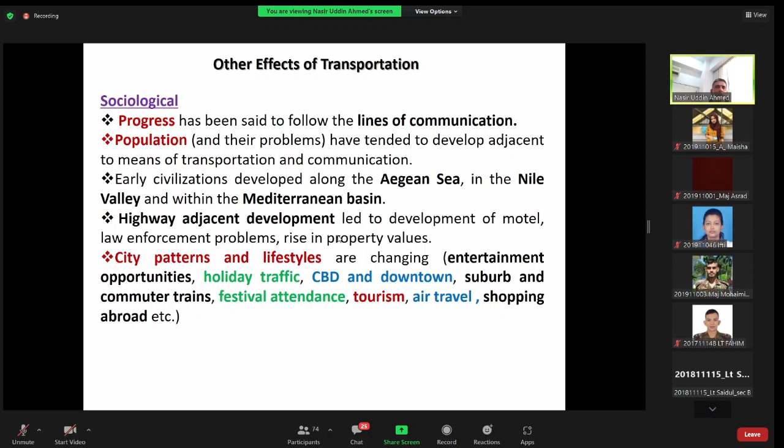And even during festivals, people go out for shopping. During Eid or during Puja, you will find that from Bangladesh a lot of people cross the border. They go to Calcutta, or some go to Thailand, and some go to Singapore for shopping. All this happened due to the development of the communication system or transport system, and these are called the sociological impacts of transportation.

Now, cultural effects. It is difficult to distinguish the cultural effects from the sociological effects because these two merge sometimes, and it becomes very difficult to differentiate between them.

If you think about a big country, for example India, it has got more than 25 states. Earlier, in each state, ethnicity was different. Now, with the development of a good road network, the difference or provincialism and regionalism has decreased. Same the case for other countries of the world.

And globally, the worldwide differences have decreased because people now move continuously. That's why you might take your breakfast in Bangladesh, lunch in Mumbai, and dinner in Dubai, and the next day you come back. That's how people are moving.

One cultural impact is that since regional differences are disappearing, it has got a negative impact because local color and character are also disappearing.

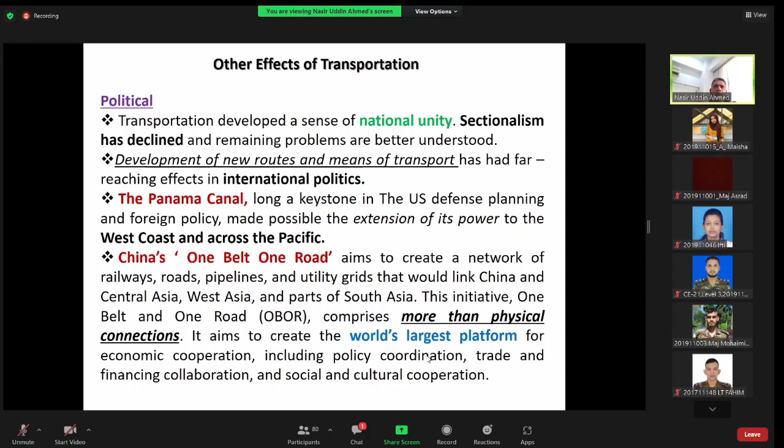And there are other factors, like congestion of cities. In cities, once they become congested, people look for alternative means of transportation. Transport agencies are also a generator of revenue for the government, and with transportation facilities, billion-dollar businesses are affiliated. So these are other factors that come up with the development of transportation.

Transportation and the individual - how is transportation connected to the individual? Transportation and someone's personal necessities, comforts, and luxuries, as well as those of his family and neighbors, are closely interrelated. So anything you buy from a shop has got a cost element of transportation.

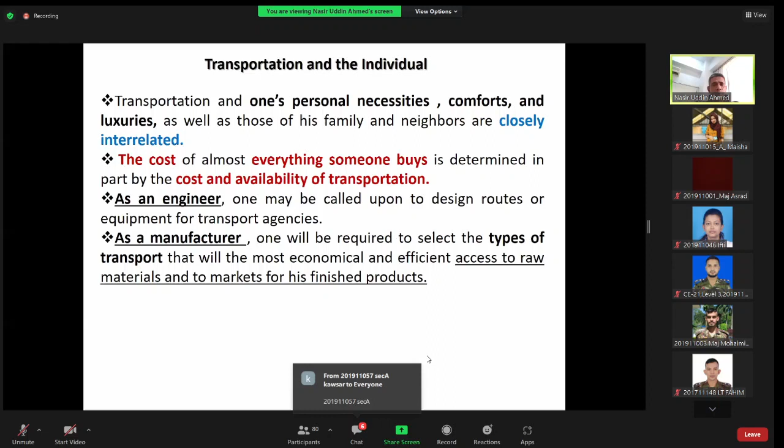How can we relate individual transportation as an engineer? For example, you may be called upon to design routes or equipment for transport agencies. As a manufacturer, you will be required to select the types of transport which will be most economical and efficient to extract raw materials or to sell or distribute finished products. Accessing raw materials requires one type of transportation system, while distributing finished products from your manufacturing plant requires a different type.

If you want to be a financier, you will find that transportation is a fertile and demanding field for investment. For example, in Bangladesh, some foreign companies want to make a dedicated expressway from Dhaka to Chittagong. The aim is that after constructing this expressway, they will operate it, for example for 30 years, collect revenues, and once the cost is recovered, they'll leave it to the government.

Those who want to finance also look for these opportunities - the development of infrastructure, and also making it a source of their earning. Recently, there have been some initiatives from China in Pakistan and Sri Lanka, and one of the ports of Sri Lanka has now become a controversial issue, with some resistance in Pakistan, because China is making some infrastructure there.

As a lawmaker, one must consider the needs and problems of the country in relation to transportation and formulation of regulatory policies. So when you introduce a new transportation system, you have to introduce new law. That's how a lawmaker is associated with transportation.

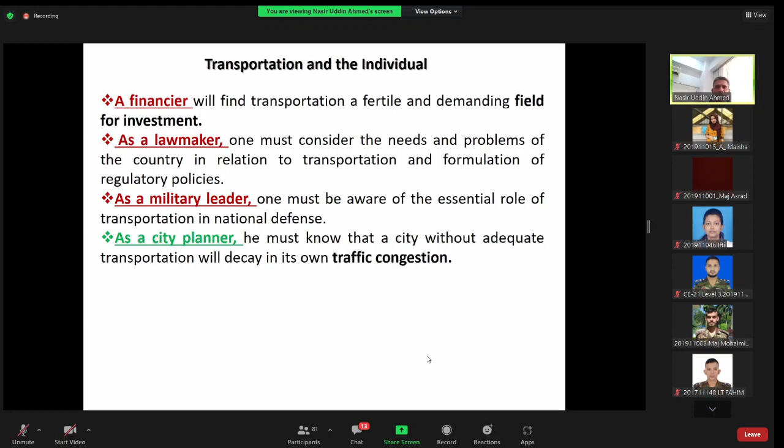As a city planner, one must know how a city will function, because the city planner will try to make a city with certain conditions in mind. So instead of car-based infrastructure development, he has to plan for public transport-based development - that means transit-oriented development. The city planner plays an important role, and that's how city planners, town planners, and transportation engineers have to work together at some point.

Then we discuss the sociological impact - with the effect of transportation, how the pattern of life and culture is changing. That is a field of study for the sociologist.

As a citizen, you'll be concerned with all of the above issues, which is required for the well-being of yourself and your country. And last of all, as a student of this course and of civil engineering, it is your obligation to understand the fundamental principles and conditions. If you don't understand properly, you may misuse the transport potential, which may incur economic loss.

Transportation is a topic about which everybody gives their opinion - why Dhaka is a congested city, how to remove the congestion of Dhaka - you will see that everybody makes some comment. But you, as an engineer, want to give an opinion that should not be a layman's view. You want to give an opinion based on a solid engineering background.

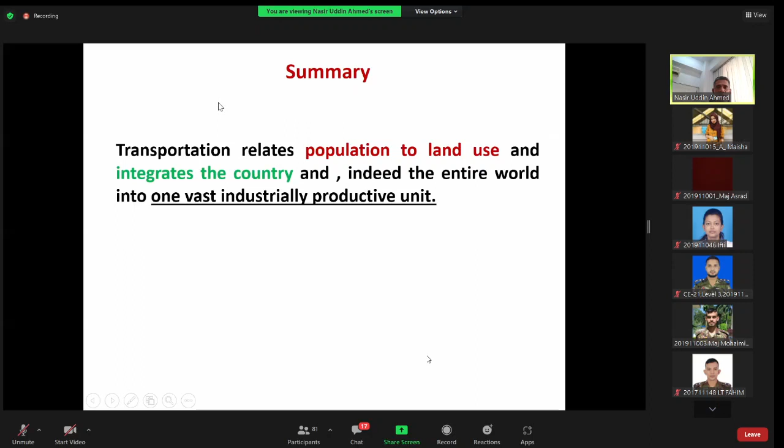So transportation relates population to land use and integrates the country. Actually, it integrates the entire world, and makes the whole world into one vast, industrially productive unit. So that is the first lesson. We'll be closing this lesson, and then shifting to our next lesson, lecture 2.

Lecture 2 is about transportation systems. For this, our reference will be the book by Khisty and Lall, Transportation Engineering, and chapter 1 of this book is relevant to this lecture on transportation systems. The topics you can see on the screen will be covered: the nature and features of transportation engineering, then the interdisciplinary breadth of transportation engineering, and system approach.

What is system approach? We'll be learning that, then movement transportation, transportation system characteristics, then some attributes of transportation systems, hierarchies, and problems related to transportation. And at last, we will relate transportation to sustainability, and the fields of transportation engineering.

The Institute of Transportation Engineers, ITE, gives the formal definition of transportation engineering as the application of technological and scientific principles to the planning, functional design, operation, and management of facilities for any mode of transportation, in order to provide for the safe, rapid, comfortable, convenient, economical, and environmentally compatible movement of people and goods.

Let's try to understand this with an example. If you take the example of MRT 6, at one stage a feasibility study was done and the route was determined. That is called the planning stage.

Once the planning stage determines the route, you have to go for the functional design of the MRT line, because you need to decide the route, how many trains will be there, what will be the capacity, what will be the landing stations, and how people will enter and leave the MRT. So those issues fall under functional design.

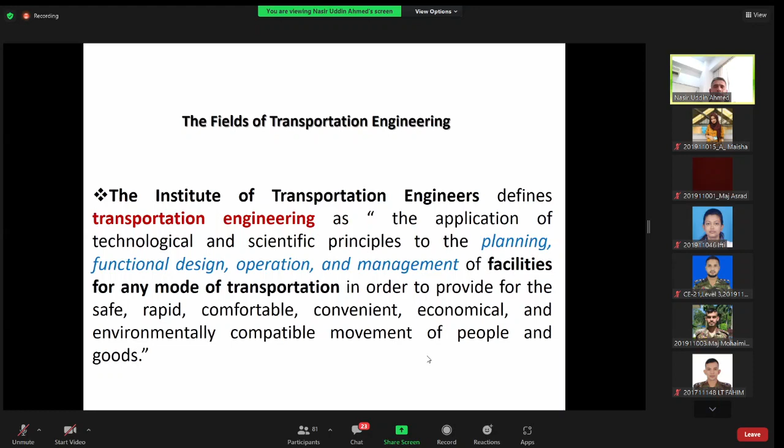Traffic engineering is more specific, a branch of transportation engineering. It deals with the planning, geometric design, and traffic operations of roads, streets, highways, networks, and terminals, and neighboring abutting lands, and relates this with other modes of transportation. Traffic engineering is an offshoot of transportation engineering.

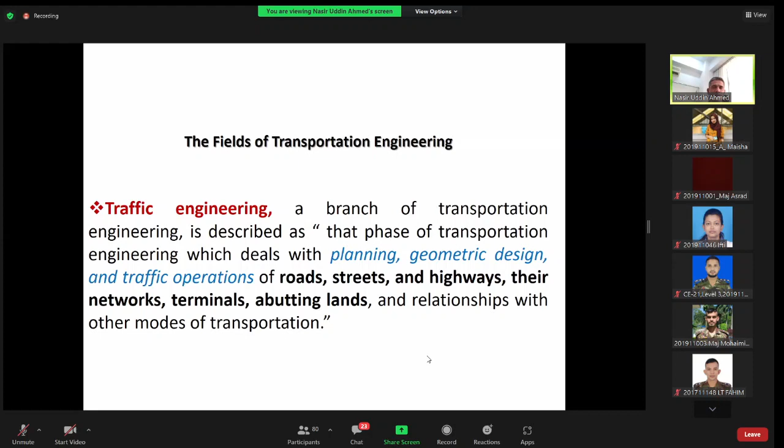Transportation engineering is said to be a multidisciplinary area of study because here you draw concepts from economics, geography, operation research, regional planning, sociology, psychology, probability, and statistics, together with the normal analytical tools of engineering.

For example, if you want to introduce an MRT system, you need to decide whether it will be a viable option or not. When you use an MRT system, you may compel people who will not avail the MRT, those car users, by imposing road pricing on them. And when you plan the MRT line, geography is an important issue to think about, along with operational research.

Operation research is a discipline which deals with the application of advanced analytical methods to make better decisions. It is a systematic approach where, through various advanced analytical tools, you can differentiate between various options and reach better decisions.

Regional planning is also integrated with transport. For example, it is said that when you plan for a subway or MRT, those subway stations or MRT stations should be such that the township around those stations gets developed accordingly, meaning the town should be developed in a concentric pattern instead of a linear pattern.

In our case, what happens is we see roads developed and then ribbon development adjacent to the road, meaning unplanned development of the city, which we see very much in our country. But with proper town planning, you can integrate MRT lines or subway lines with the town planning system, so that the system you are developing becomes a transit-friendly system.

Sociology covers the behavior of people, whether they will accept it or not; psychology covers their mindset; and probability covers the likelihood of using facilities. All these help determine the future or probable condition of a specific route. For example, if the traffic volume today in 2021 is X, then maybe by 2025 or 2030 it will be more. So you have to make some analysis, and you will require statistical tools to analyze those issues.

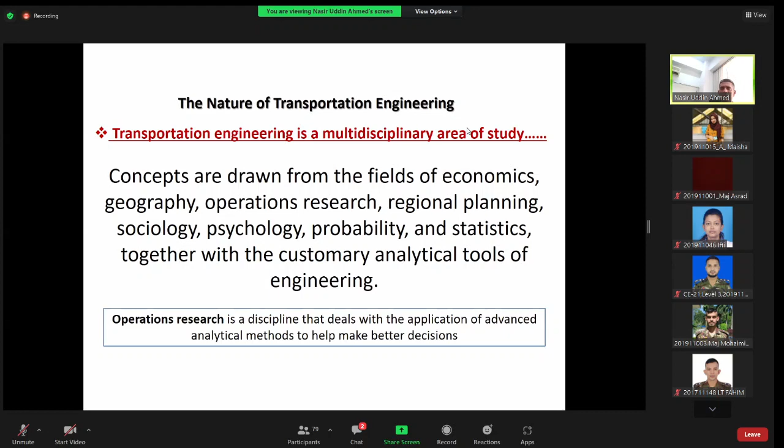That's why it is said that it is not only about transport engineering. You should have ideas about economics, regional planning, sociology, psychology, statistics and other issues. In the next slide, you can see the interdisciplinary breadth of transportation engineering.

In this slide, the upper left part shows social science, economics, planning and architecture, and system engineering. This falls under transportation planning, and these are called the soft side of transportation engineering.

On the right bottom side, you can see geometric design, soil mechanics, and pavement design. These are called the hard side of transportation engineering. Together, the soft side and hard side make up transportation engineering in total.

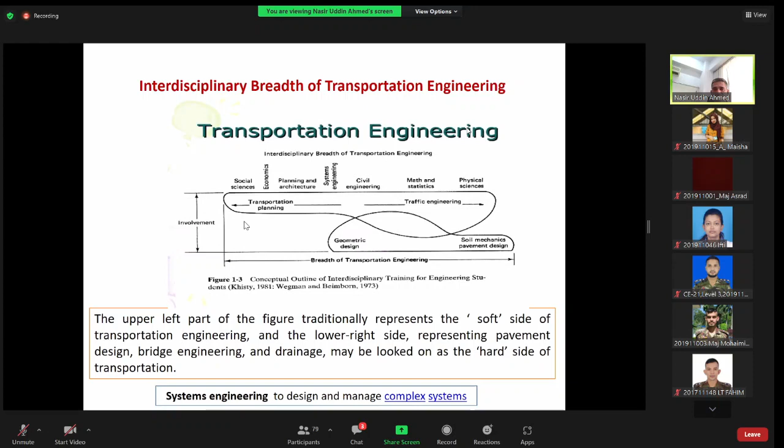System approach of transportation engineering. What is a system? A system is a set of interrelated parts called components that perform a number of functions in order to achieve common goals. In a system, there are interrelated issues which, if synchronized, make the system perform. System analysis is the application of scientific method to the solution of complex problems.

This is a major hassle because our road networks are developed in such a way that dedicated pedestrian walkways are not present, and sometimes disabled people cannot use those footpaths. At intersections, the facilities for pedestrians are not enough, and the system is not pedestrian friendly. So these are the community problems.

And then design alternative actions to achieve step 2 and 3. So in step 2 and 3, you have set your goals, you have set your objectives, and then now you find out what are the alternative actions you have. And then we evaluate alternative actions in terms of effectiveness and costs.

For example, for the pedestrian crossing in the mid-block, you may go for underpass, you may go for a foot over bridge, or in an intersection also you can go for overpass or underpass, or you may just keep it as it is, meaning with the signal the pedestrian will cross. So effectiveness and cost, these two terms will come at that time.

Step 7 is question the objectives and all assumptions. So again, you are questioning the objective that you have set, the assumptions that you have made. And then in step 8, you look for new alternatives, or you modify your plans, and then maybe you establish new objectives, and you repeat the cycle until a satisfactory solution is reached, which will meet the criteria, standards, and values.

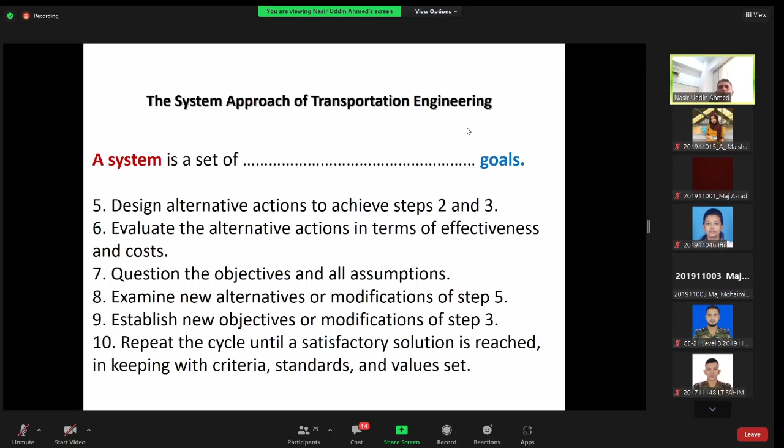So that means the system approach of transportation engineering is that first you have to identify what is the need of the community of the users, and then you have to set the objectives or goals. Then you have to look for various options. You have to see which option is most cost effective, effective in terms of operation and cost, and which is convenient and brings comfort for the users. And then after a lot of trials, you reach a solution. That is called the system approach of transportation engineering.

Now I'll be talking about the movement in transportation, conditions for movement of people and goods. This is important. The first topic is complementarity, that means the relative attractiveness between two or more destinations.

For example, if you are living in point A, whether you go to point B, point C, point D, or point E will actually depend. For example, you are living in Uttara. Now for study purpose, you may come to MIST, you may go to Dhaka University, or you may go to Bashundhara where there are some private universities. So the place has got some attractiveness, and then you have got some special facilities. These are the issues you look for at that time.

Then the desire to overcome distance, which is referred to as transferability. It is measured in terms of time and money. You need to overcome this distance using the best technology available. For example, from Uttara, if you want to come to MIST, what are the options you have? You can come by bus at present, or you may use your own car, or you may have multiple transportation modes. At that time, you will see which one saves you time and which one saves you money. That's how you choose.

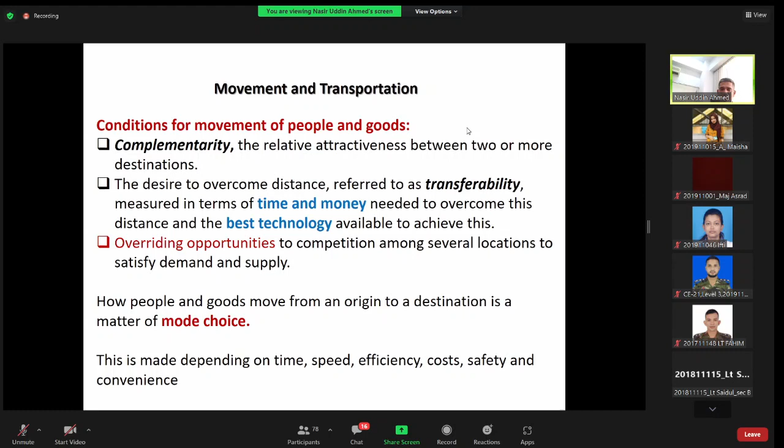And then the last point is overriding opportunities, that means when there are several locations and you have to choose out of them, which location has got better opportunities. So that actually guides the movement of people and goods based on these issues: complementarity, transferability, and overriding opportunities. So how people and goods move from an origin to a destination is a matter of mode choice. This mode choice is made depending on time, speed, efficiency, cost, safety, and convenience.

This slide shows the simple connection between land use and transportation. It's like a circle, because certain land use will produce certain amounts of certain types of trips. If the land is used for residential area, every day morning there will be some trips made for school, some trips made for work, and some trips made just for shopping.

And if the land use pattern is an industrial area, the mode of transport will be different. So based on the trips, the transportation needs will be different. For an industrial area, transportation need is one thing; if the land use pattern is residential area, transportation need is another.

Then you have to look at what facilities you have. For a residential area, you may have an MRT to connect that residential area to other destinations. You may have taxi cab, you may have BRTs, you may have private cars. What transportation facilities do you have?

Again, that is connected to accessibility. There are MRTs, there are cars, but can you afford it or not, and which one is good for you? That is one issue. At the same time, the road network that is available, whether it allows you to access a particular facility or not. For example, your house is located...

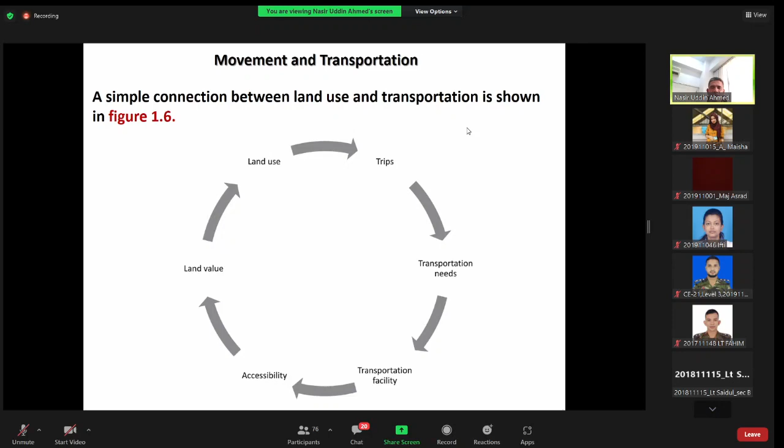With transportation facilities, as I said previously, land value is related. Whenever new facilities are developed, land value increases, and land value is related to land use. So land use, trips, transportation needs, transportation facilities, accessibility, land value - these are all interrelated. Land use is one of the prime determinants of movement and activity.

We're talking about movement and transportation, and this activity we'll call trip generation, which will dictate what transportation facilities - streets and bus systems - will be needed to move traffic. So a change in accessibility will determine the change in the value of land, and this change may affect the way the land is currently used.

For example, for Mirpur DOHS, those residing there - if people find that they can easily access the MRT stations located at Pallavi, the land value will be one type. And if they don't have that access, the land value will be different. So a change in accessibility determines the change in land value, and it will change the way the land is used.

Now, if such change occurs - meaning if a residential area changes to a commercial area - the trip generation rate will change, and the whole cycle of changes will result.

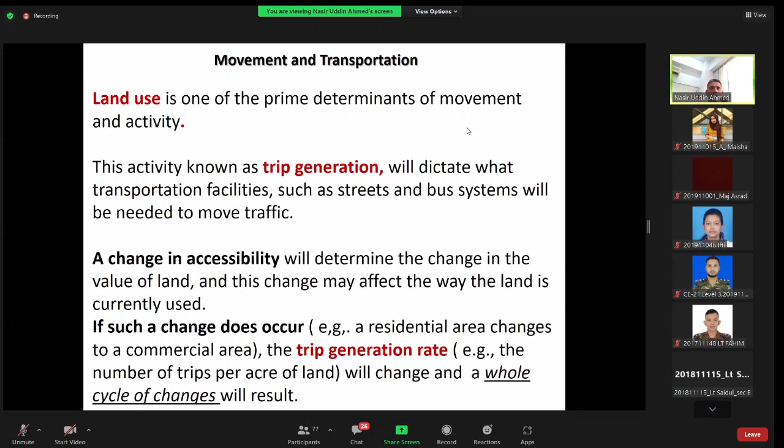Transportation system characteristics - this is a simple slide. There are 4 basic elements in most transportation systems. One is called a link - meaning the roadway, which connects two or more points, such as roadways, sea lanes, airways, waterways, or beltways.

Then you'll be requiring vehicles - it can be a motor car, bus, ship, or airplane. Then you will be requiring terminals, meaning the nodes for travel, and in case of sea, where the shipment begins or ends.

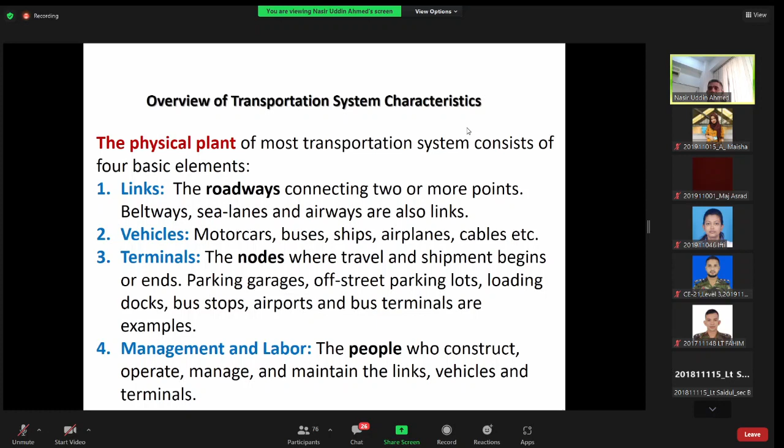Then you'll be requiring parking garages, off-street parking lots, loading docks, bus stops, airports, bus terminals - these come under terminals. So one is the road itself, one is the vehicle, then the terminals, and then you'll need some people to manage, operate, and maintain these links, vehicles, and terminals. These are the 4 basic elements of any transportation system.

This is an important basic attribute of the transportation system. Transportation systems can be evaluated in terms of 3 basic attributes: ubiquity, mobility, and efficiency. What is ubiquity? It means the state or capacity of being everywhere - the amount of accessibility to the system, the directness of the routing between access points, and the system's flexibility to handle a variety of traffic conditions.

For example, if we take highway and railway - highway is more ubiquitous compared to railroads because highways are more accessible. Routes give more or less door-to-door service. But in case of railroads, they follow a fixed line and do not give door-to-door service. So from the ubiquity point of view, highways are more ubiquitous than railroads.

But within the highway, if we talk about freeways and local roads, freeways are less ubiquitous because freeways have access control. Your house may be located just beside a freeway, but you may not have access to it. Local roads and streets are more accessible.

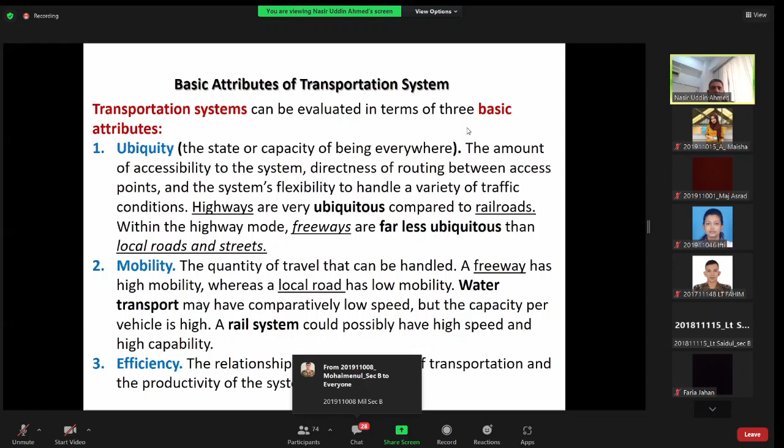Table 1.1 summarizes the basic characteristics of major transportation modes. Just see the slides; I won't go into details like highways, ubiquity, mobility, efficiency, mode, passenger and freight, then rail transport, air transport, and water transport. You must go through these in terms of the three attributes—ubiquity, mobility, and efficiency—and see which modes relate to each system, classified into passenger and freight categories. Let's go through these slides.

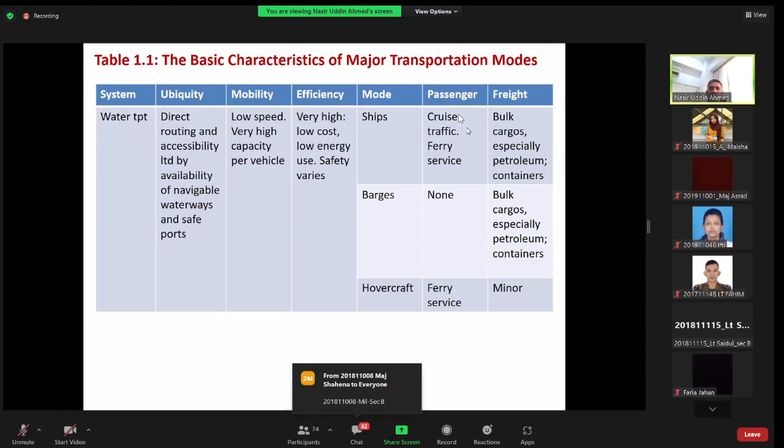Transportation systems hierarchies involve the classification of transportation modes into different operational or functional classes. Now we're talking about the functional classification of highways, because if we classify roads based on the function they provide, it becomes easier for others to understand—for example, economists, sociologists, planners, and administrators can classify roads according to their functional use.

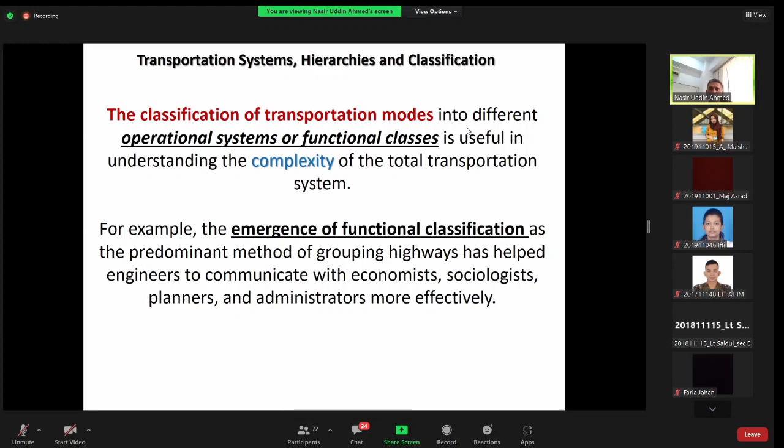This functional classification is widely used in Western countries but not much seen in our country. In our case, roads have RHD or LGED classifications based on traffic volume—national highways, regional highways, district roads—and with the increase of traffic volume, the status of these roads changes. So our classification is based on traffic volume, but in other countries, they classify roads according to their intended use.

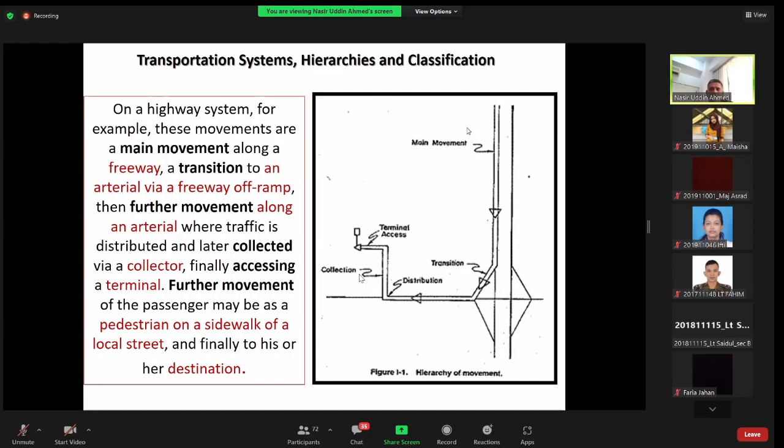Looking at this slide, this is the highway hierarchy. For example, this is the expressway, so the main movement occurs through this freeway, and through a ramp, they may come to the arterial. Then from the arterial, through a distributor road, traffic is delivered to the local streets. Similarly, from the local streets, traffic is collected and delivered through a collector road to the arterial, and from the arterial it is delivered to the freeway. This is the basic mechanism.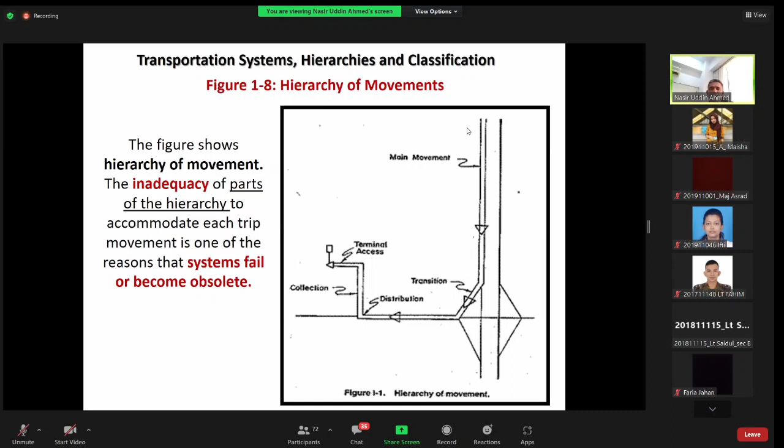So you can see there is a hierarchy of movement. The adequacy of each part of the hierarchy to accommodate each trip will dictate whether the system is functionable or not—there is a balance you have to maintain, it's a science. How much area in a city should be allocated for freeway, arterial roads, collector roads, and local roads is prescribed. If you do not follow that, and it does not match the demand, then the system will fail—that's actually what is happening in case of our capital.

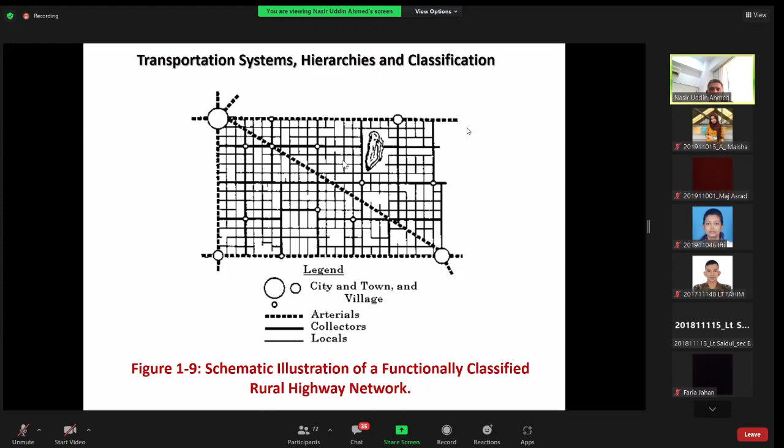This slide shows a schematic illustration of a functionally classified rural highway network. You can see the arterials—this strongly black dotted part represents the arterial roads, these are the collector roads, and these are the local roads. The road network should be developed in this way.